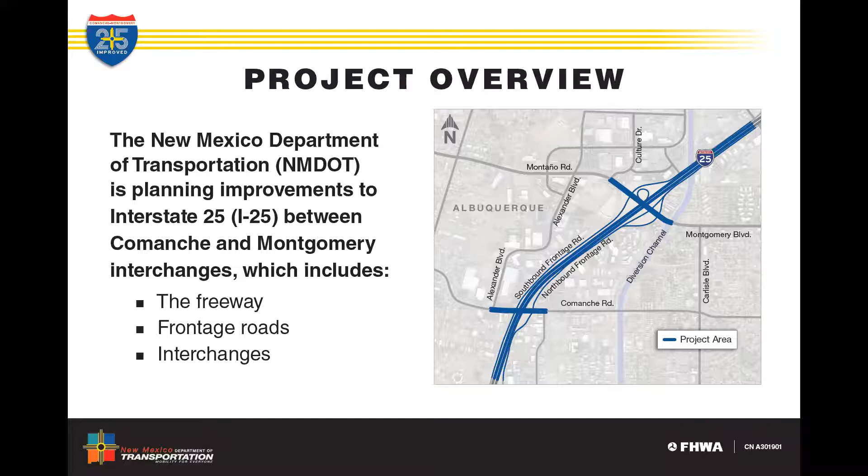The purpose for the project is really to improve the efficiency and operation along the freeway main line, the associated on and off ramps, the frontage roads that are adjacent and parallel to the freeway, and the interchanges. Really all of it's in response to growth in travel demand and traffic in the area, and to prepare for growth over the next 20 years or so.

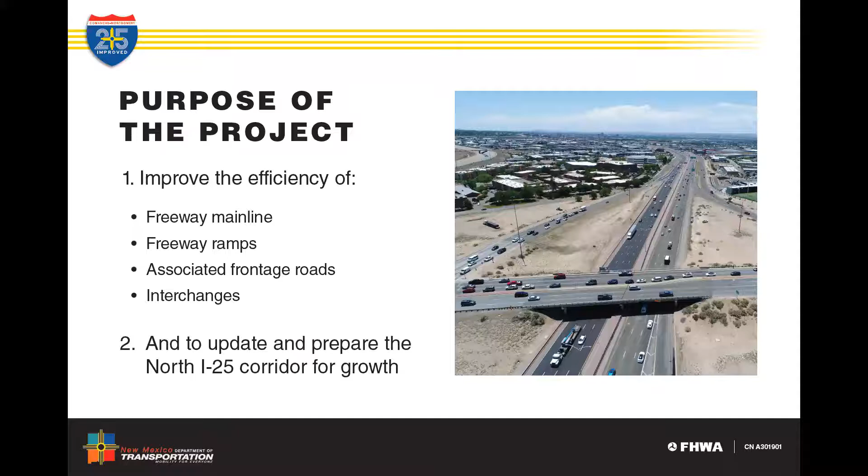It's been a process getting to this point, and this timeline kind of demonstrates that. This process, believe it or not, started over 10 years ago with planning studies that the department did for the I-25 corridor from the interchange at I-40, the Big I, all the way up to Tramway Boulevard. They've been implementing different pieces of that plan as funding is available, and this particular project and this length of the corridor is next in line for that. So we're at the point where we're getting this project ready for design and construction.

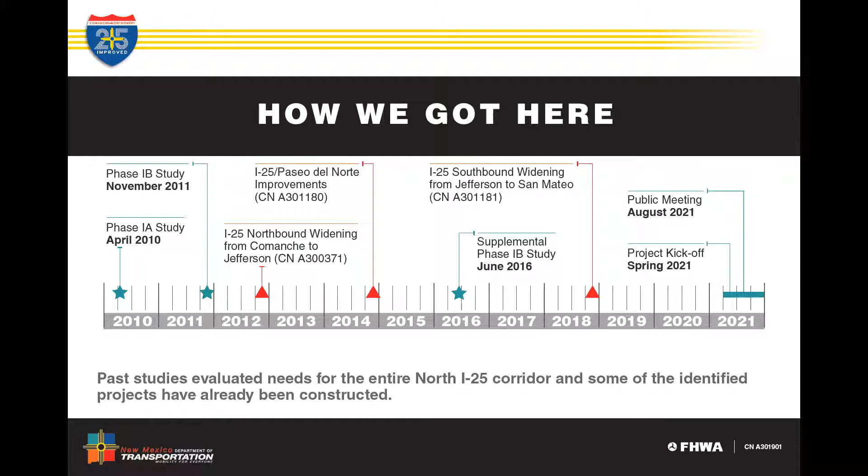Let's talk about outreach we've done so far. We held a public meeting in the fall, and it was really two meetings. We offered an online Zoom meeting where people could join and learn about the project, and a lot of the information we're sharing today is very similar to what we talked about back in August. We also offered an in-person option. With COVID, we were trying to be careful, sensitive, and smart about the way we approached it, so we had the online meeting and some in-person availability. We also took comments from the public at that time as part of our environmental process.

Since that time, we've had over 60 individual meetings with adjacent property owners and businesses. That's not 60 individual owners or businesses - there's probably between 30 and 40 that we've met with, and some of them we've met with multiple times. We've been trying to get out and talk to anybody adjacent to the corridor who would likely be impacted directly as part of our project.

We're also meeting monthly with the city of Albuquerque. We have a core group of staff, and Melissa Lozoya is assigned as the key contact. We're meeting with lots of different departments and individuals to coordinate and make sure the city knows what our plans are and that the project is coordinated. We've updated the city council twice, and we'll continue to do that throughout the project so they stay in the loop. We've also met with GAATC, the Greater Albuquerque Active Transportation Committee, twice, and Mike's going to talk a little more about our design and share how their feedback has shaped some of what we're trying to do for bikes and pedestrians interacting with our interchanges along the corridor.

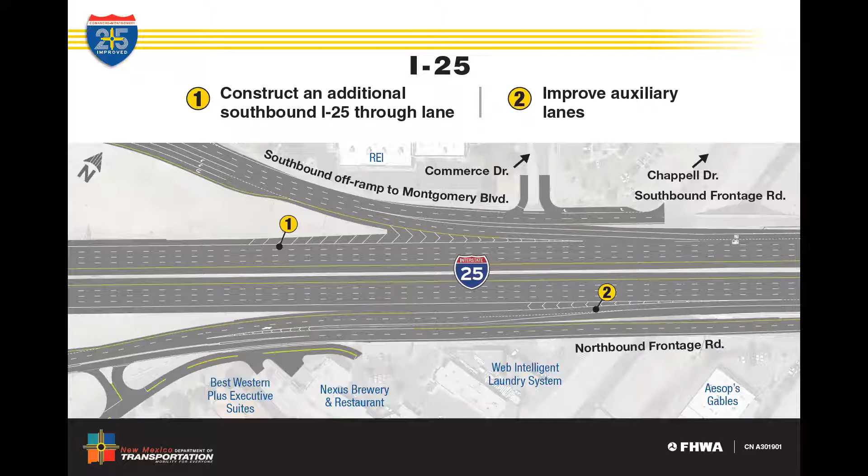So we can go to the next slide. Along I-25, I mentioned that on and off ramps will be reconfigured and lengthened to provide improved acceleration and deceleration length and better weaving configurations, giving better space to get on and off and negotiate your way through traffic as you're getting on or off the freeway. Next slide.

As I mentioned, the frontage roads will be reconstructed and improved. There's a feature shown in the middle, and one of the main features of the project is that because of the proximity between Comanche Road and Montgomery Boulevard, the interchanges are close enough that it makes it difficult for vehicles getting on and off the freeway to weave across one another as one's getting on from one interchange while crossing over another getting off at the next.

Because those two interchanges are close enough, one of the things included in the project is what we call braided ramps. Those movements would be grade separated with a bridge going over for one movement going over top of the other. So if you're getting off northbound at Montgomery Boulevard, you would cross over top of those people getting on northbound onto the freeway from Comanche. The corollary going the other direction on the opposite side is true as well.

If you want an example of this, I like to refer to one north of here. There's an example of this getting off northbound I-25: if you're going to access directly Ellison, there's an off ramp to get off at Ellison, and you cross over the top of an on-ramp northbound from San Mateo. That's a braided ramp, the same sort of feature as here.

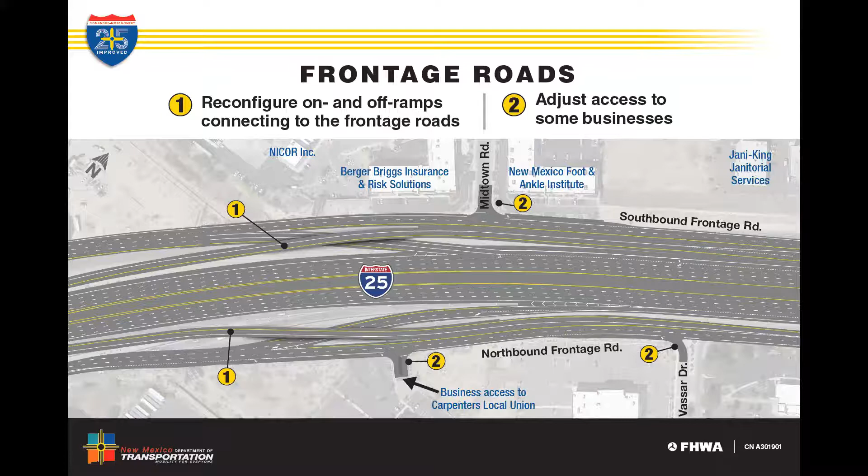Next slide. And then at Montgomery, to accommodate all of those additional turn lanes, additional bicycle and pedestrian paths, and the advanced U-turns or Texas turnarounds, the bridge of Montgomery over top of I-25 is going to be quite a lot bigger, essentially twice as wide as it is today.

But all the similar features apply. The difference between Montgomery Boulevard and Comanche is that Montgomery goes over the top of I-25. One thing that's really important to mention is that, going southbound on I-25, there are currently only 3 through lanes, or general purpose lanes, that cross underneath that overpass. That's kind of a bottleneck for people traveling southbound, particularly during the morning rush hour, and it can cause backups. That will no longer be the case.

There will be 4 lanes. There won't be the loop ramp anymore. If you're going east or westbound and looping around to go southbound on I-25, that's being replaced with a double left turn lane, providing 2 lanes of traffic turning left to go south there. That allows the 4th lane to be added.

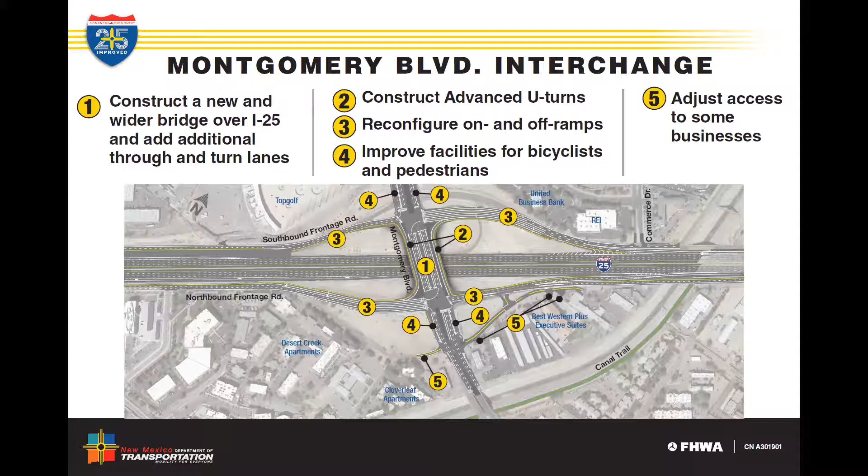All right, next slide. I think those are basically the main improvements. The project will also include aesthetic elements.

There's an aesthetic plan that's included. That theme was developed by a local artist, and that came out of a process called CAFE, which stands for Call for Entries. Basically, there was a call for people to submit artistic concepts from the community, and a local artist won. His idea won that panel.

The panel chose his concept, and the whole theme is based on diamonds and this blue color. Those aesthetic elements will be built into the hard features of the project. They'll be included on the retaining walls and bridge features, so you'll see that inlaid with the color and the shapes.

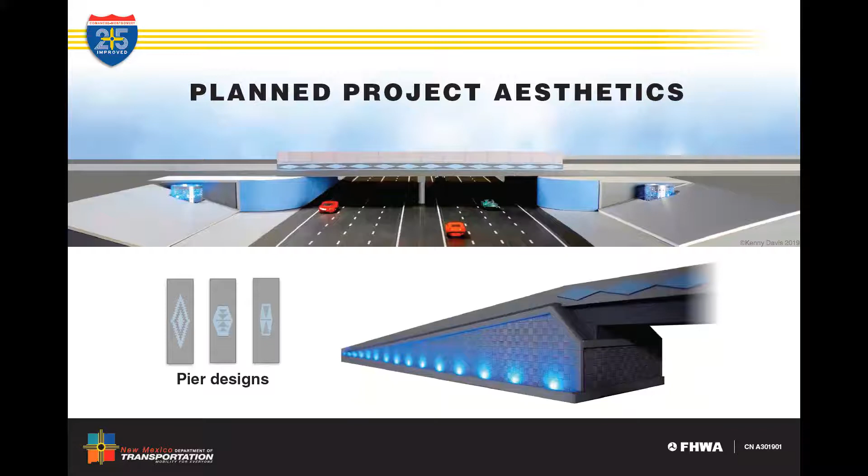At this time, landscaping is not part of the project. But if the City of Albuquerque is able to find some funding for that, we can add it. Otherwise, it'll probably come at some later point after the main part of the construction is completed.

So, next slide, our schedule. One important thing I briefly mentioned is the phrase design build. This project is being implemented a little differently than most traditional projects the department does. Most department projects have a design done, then it goes out for advertisement, contractors bid on it, and a contractor builds it. This is what we call a design build process, where the department will ultimately contract with a design build team to both design and build it.

Our particular role right now is to help the department get the project ready for that and prepare procurement documents and contract documents to get that done. We're in the process of doing all that now.

We will release what we refer to as a design build request for proposal later in the early fall of this year. Then proposing teams will prepare proposals over about a 4-month period. At the end of the year, during the winter of 2022-2023, the department will evaluate and make a selection of the successful team and proposal.

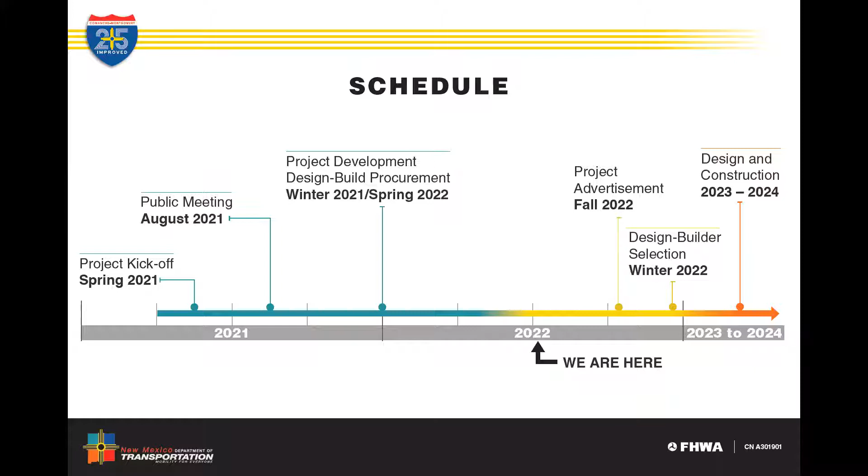Bo, you want to wrap us up here? Yeah, Mike talked about our schedule and construction.

One of the things we'd like to do as we wrap up this phase and get a contractor on board is host a Meet the Contractor open house—some type of meeting where you can see the final design and the concepts they've come up with. We'd have more information at that time about traffic impacts and maintenance of traffic, and we'd have a better schedule as well.

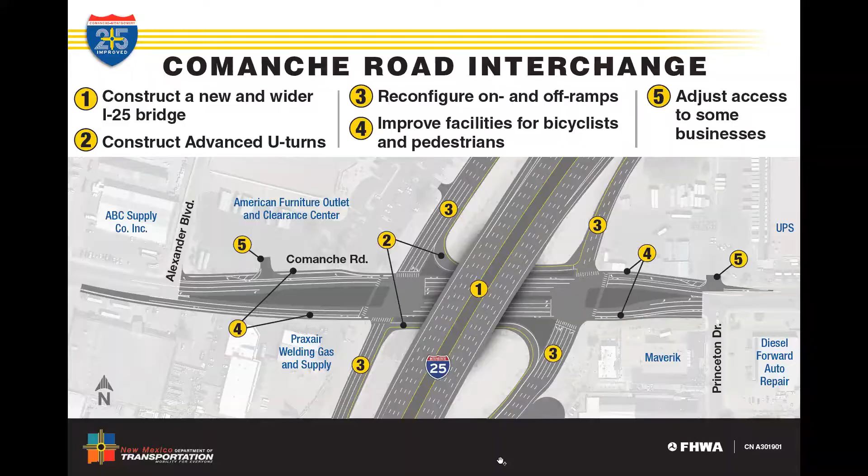Jerry, can you hear me? Yes, we can hear you. Thanks for being part of it.

What is your question? I just want to thank you about the Comanche exit because it is one of the worst. And I also wanted to make a comment about those Texas U-turns. I was in Amarillo a while back, and they are absolutely wonderful. I think it's going to alleviate a lot of traffic accidents and so on. But yeah, I'm for calling them a New Mexico turnabout. It's still, you can work with me and Pat on that. It's going to be our project for the next year.

That sounds good. The naming preference of those seems to depend entirely on whether you were born in Texas or not. I also wanted to say, on Montgomery, it's always backed up at certain times of the day. But what really bothers me there is that bridge where we have homeless on the sidewalk that just pass out and crash there. Their legs are onto the street. Will there be a sidewalk that's wider or what?

Yeah, the sidewalk will be a lot wider. In both directions. And then actually through the interchange itself, there will be raised barriers between that sidewalk and the traffic. Oh, wonderful, wonderful. Thank you. Thank you, Jerry. Appreciate it.